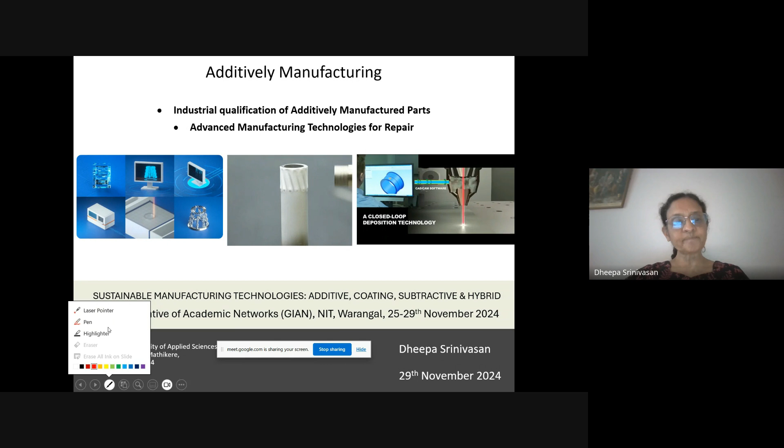I just wanted to check, are you able to see my mouse moving? Yes, yes. Or maybe I'll use the laser pointer.

In the last four or five days you would have heard a very good introduction as well as several details of the historical evolution of different types of metal additive manufacturing, polymer-based additive manufacturing, and more recently, design for additive manufacturing. I won't repeat any of those.

What I will show via this chart: the y-axis is simply showing the complexity of the part, and the x-axis is showing the different process-related parameters, just to give you a process map of which additive manufacturing technology is the right one, form fit and function, to choose for each application.

Even if you're in academia and would like to look at fundamental aspects of these, it's always good to keep in mind at least the end application, and then look at the research aspects and what are the challenges in those research aspects.

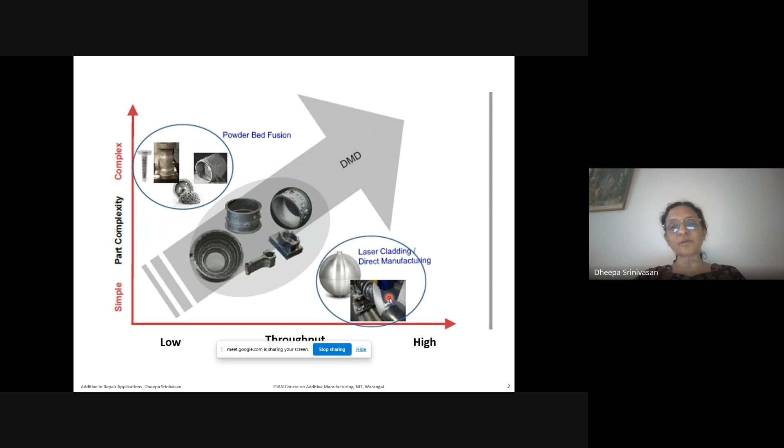For example, if it is a very large part, it is not very feasible economically or process-wise to use laser powder bed fusion. But if it's a very small part, such as what Mr. Santosh would have told you yesterday, in design for additive manufacturing with very high resolutions, then it may not be feasible or viable to go with directed energy deposition, because then you can't get the kind of surface finish and part resolution, and it needs extensive post processing.

So, based on the simplicity and complexity of the part, and based on the throughput—high versus low—that means how many parts do you need.

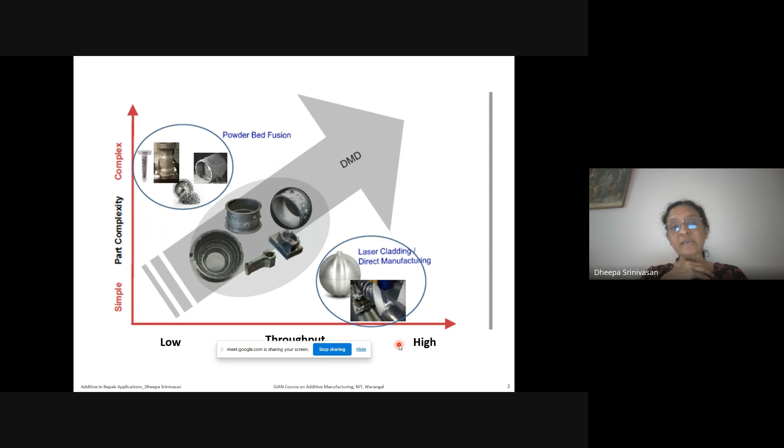For example, if you're in the automotive industry, many tens of thousands of parts every day. Now if that is the case, then which is the technique to use. So before starting the research or something, it is good to keep this in mind. So I thought I'll just showcase that and start off on repair applications.

This is a very old chart taken from the literature, and it's also not very updated. You can see it's tracking about 70-75 years of historical evolution of various types of gas turbine materials, especially for the turbine blades. As many of you know, in any structural engineering turbo machinery, especially in something as complex as a gas turbine, in this context we'll be talking about both industrial gas turbine as well as aero engines. Then you can see here that typically it takes a lot of effort to be able to get a very small percentage of efficiency. You can see that 40% to 60%, it has almost taken from 1970 to about 2005, almost 50 years it has taken.

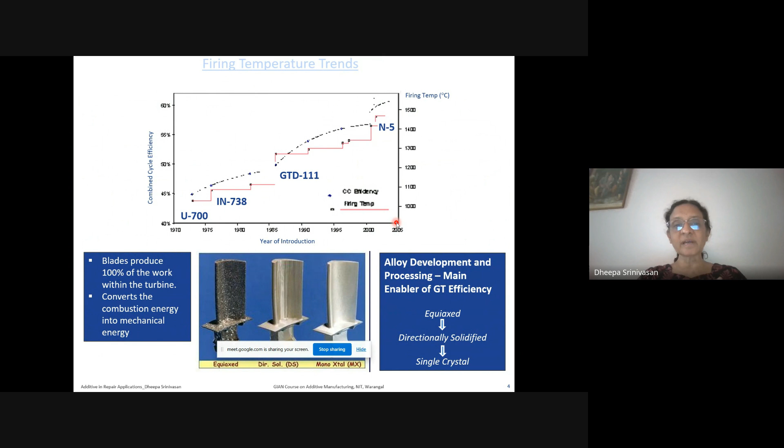Since I worked in the gas turbine industry, the application I'm showing you is for gas turbine repair and refurbishment. So again, on this slide, some of these names you're seeing here: Udimet 700, Inconel 738. This is a particular alloy which is single crystal, N5, it is called. So some of these alloys almost defy the imagination of the designer, because these are nickel based super alloys, which are the main claim to fame to the gas turbine technology evolution. And they have so many alloying additions. Each of them plays an indispensable role.

So when it comes to the distress, after service exposure, for example in a gas turbine stage one blade, then the temperature decreases from top to bottom, and the stresses increase from top to bottom. It's a rotating process. So what happens? There is distress. Obviously, anything that undergoes service will undergo wear, rub, high temperature creep, time dependent inelastic strain, fatigue. There'll be holes, there'll be oxidation, there'll be metal loss. So many distress, or so many degradations will be there.

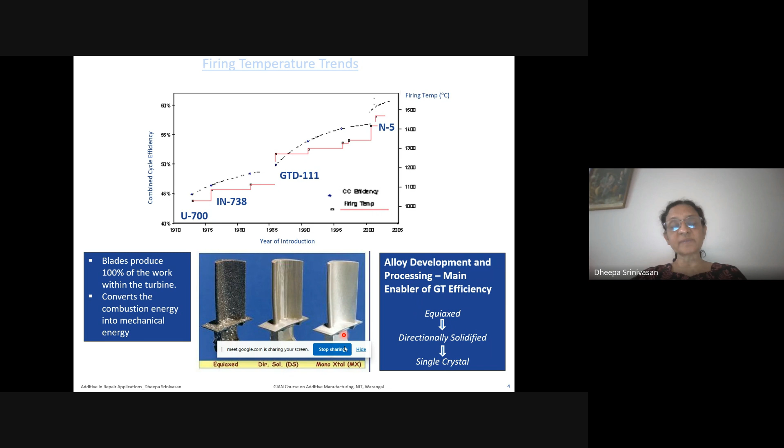And what I'm trying to say is we need to find newer solutions, because some of these are impossible to repair and refurbish. So where metal addition, in terms of metal additive manufacturing, and thermal spray coatings, both of these come into the picture as a savior. And this is something we started actually working on long back, 15 years ago, as trials, as research and development efforts, long before additive manufacturing actually became a buzzword. So those are the examples I'm going to be sharing with you in the next hour or so.

So if you look at laser metal addition, then what are the key parameters for it?

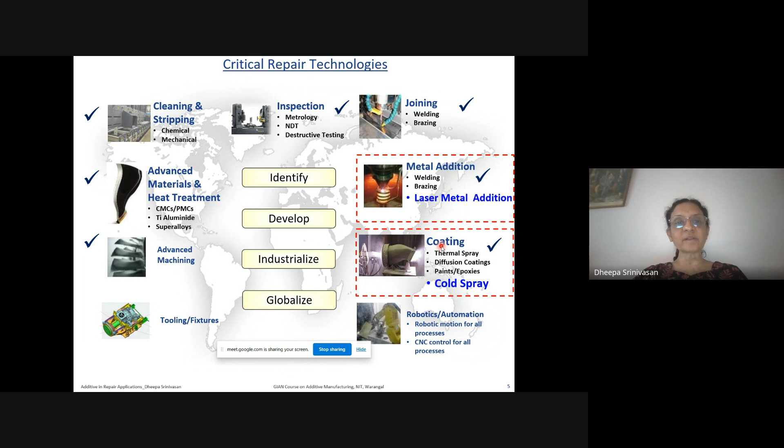There is also an upper spec limit and a lower spec limit, depending on each type of equipment manufacturer and each type of company, which have acceptability criteria. But for something like gas turbines, there are global standards too. People have to qualify under what is called the FAA, the Federal Aviation Administration.

There is also the European Union Aviation Safety Agency. In India, we also have the Directorate General of Civil Aviation. Like ISO, you need to have regulations, specifications, and certifications in order to repair and put a part back into service, just like for new make.

Except that after a certain amount of repair, after a certain number of operating hours, the cost of repair can exceed that of a new make—just like in our home appliances. If we have a microwave oven and keep replacing the magnetron, after four replacements it outweighs the cost of a new microwave oven, isn't it?

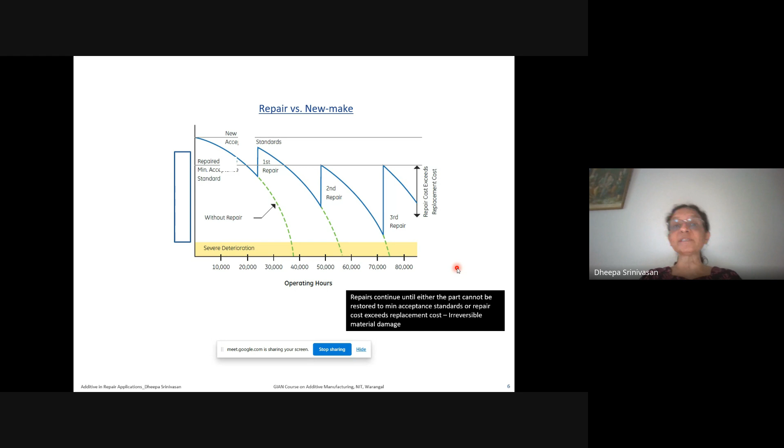But if you have to use that to repair an existing part, then what about restoring the material back to its original service standards and acceptance standards in terms of performance until the next interval? So there are a lot of complications.

It's quite a complex problem, and that is where we thought we will take advantage of all the advantages given by additive manufacturing. You would have heard Professor Shrikant Joshi speak about it the last three days, namely additive offers design for additive manufacturing in terms of simplification of parts, reduction in weight via DfAM, and being able to design very complex geometries that can improve performance.

Overall, you don't need to stock up parts and lock up liquid cash, and if necessary, we are able to make it perform to much longer standards and much higher overall performance in terms of design for the next-in-line technologies.

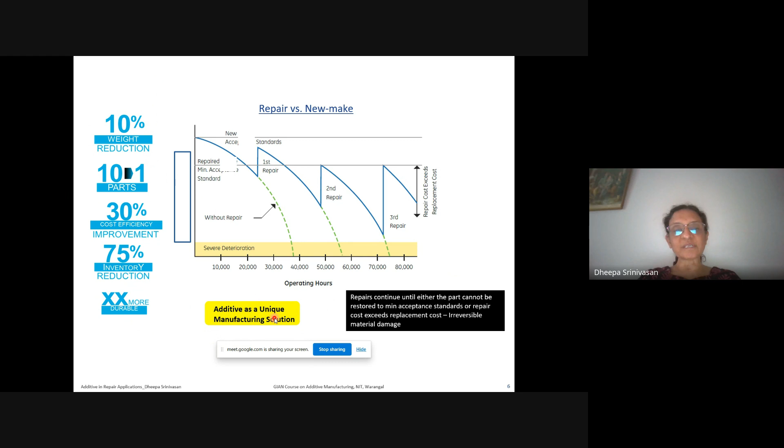So we thought we will take into account repair and use additive as a unique manufacturing solution. Why? Because of the very high rapid solidification, of the order of a lakh to a million degrees per second, that takes place in metal additive manufacturing. We wanted to examine this, because necessity is the mother of invention—if there is no solution available, we have to look at ingenious ways, and that's where additive comes to the rescue.

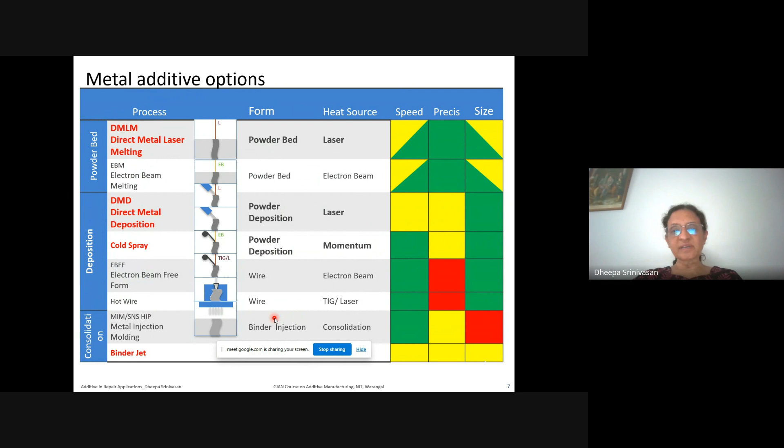So this is just another tabular form of the same, where on the rows I have listed all the different types—direct metal laser melting, which is nothing but laser powder bed fusion, and direct metal deposition, which is nothing but direct energy deposition.

And I mentioned to you cold spray is a different powder technique without any melting and solidification, and so forth. But what I would like to highlight mostly is this traffic light kind of qualitative comparison.

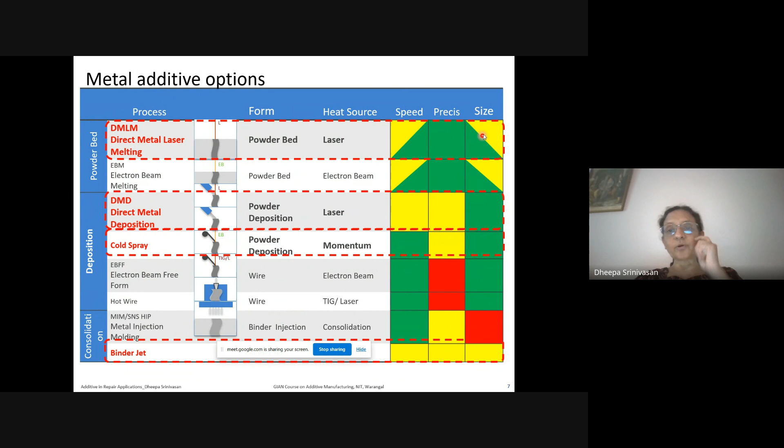This is just to give you an idea: if you want high precision, then you go to direct metal laser melting or metal additive laser powder bed fusion. If you want great speeds, perhaps this cannot churn out - it's a little bit of a slow process. All are slow, but relatively speaking, direct energy deposition is much faster compared to laser powder bed fusion. If you want to make large footprints - 800 millimeter by 800 millimeter by 1 meter parts - then you're not choosing the right technology if you go to direct metal laser melting. Instead, direct energy deposition is the best, and so on and so forth.

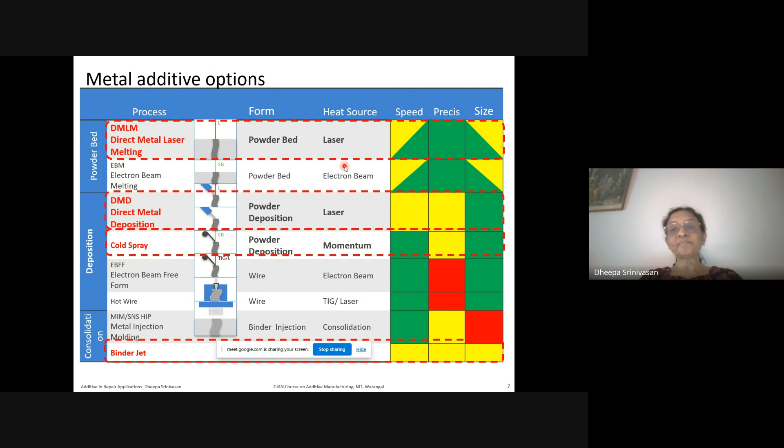I won't run through all of them, but I'm saying, for people who are starting out or who are interested in an application, or even if there is a fundamental scientific understanding that we want to do, it is good to keep in mind which of the techniques is suitable for which application. So these are the metal additive options.

The examples I'm going to give you are two. This was done in collaboration with Intech DMLS in Bangalore, and the direct energy deposition with DM3D in Michigan. One example I'll give you with laser powder bed fusion, the other is direct energy deposition.

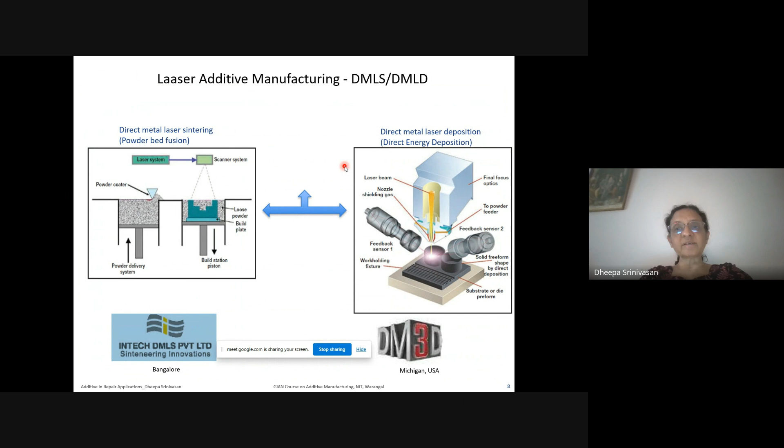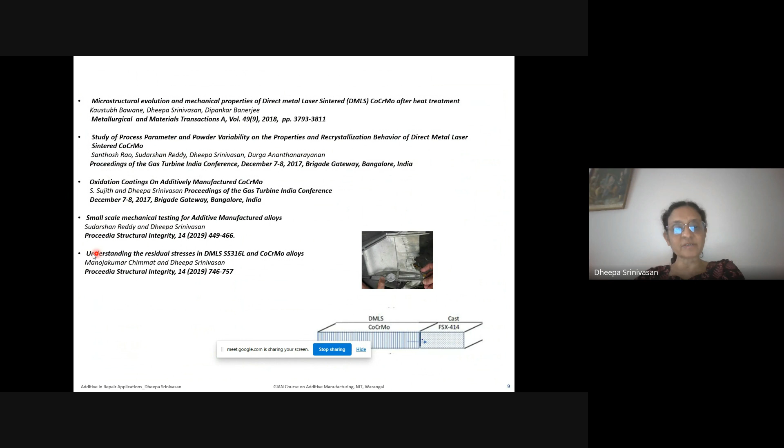And the first example - these are all published works done by various students. MTech students Kaustubh Bawane during his stint as an intern, then we've got Santhosh and Sudarshan from PSG Tech and from SASTRA University. This study on parameter optimization, both of them were master's students. Then Sujith, who was from NIT Surathkal, and later some of this work developed in small scale mechanical testing, published and done by Sudarshan Reddy. And then Manojakumar Chimmat was another master's student from NIT Surathkal.

So the application here is basically a worn part, and most of the structure-property correlation I'm showing can be found in all these papers. The application was a worn out stage one nozzle vane, which was made of an investment cast cobalt tungsten alloy. There was really no repair solution available because this was an investment cast part.

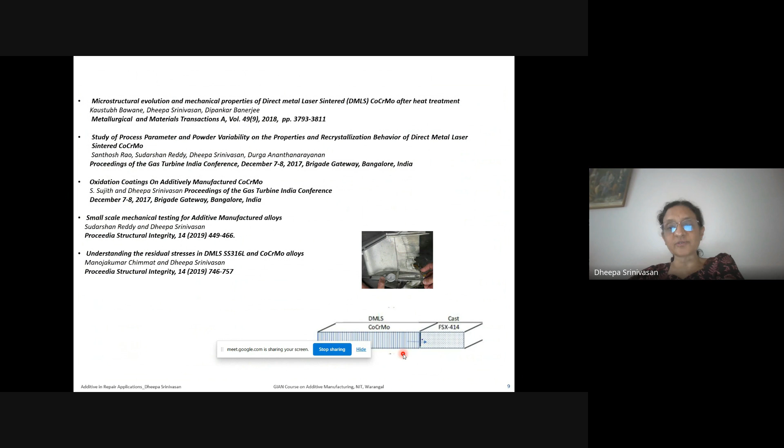So we came up with the idea of using additive manufacturing, using the laser powder bed fusion technique as well as the direct energy deposition technique, just as a proof of concept, to see if we can print this part and then join it by TIG welding. So this is the application - completely dissimilar material welding, dissimilar manufacturing, and then upon that conventional welding.

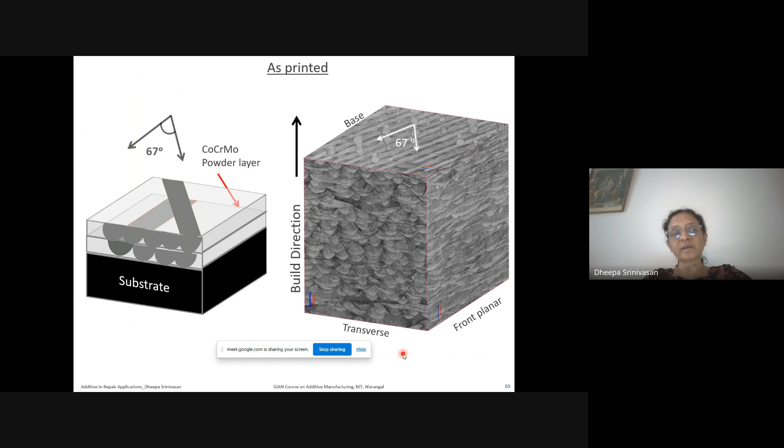So it's sort of a hybrid approach in repair, and I'm going to tell you some of the challenges we faced, and how we overcame that to successfully take it to about a technology readiness level 4 to 5 to 6, all the way from 0 to 1 technology starting point.

Okay, so you're all familiar with the layer by layer welding and solidification process. There's a nice 3D etched microstructure of cobalt chrome moly. This is the build direction - the heat is extracted along this direction in this particular case. There's a nice etched microstructure that the MTech student Kaustubh Bawane actually etched, and then he has put together a collage.

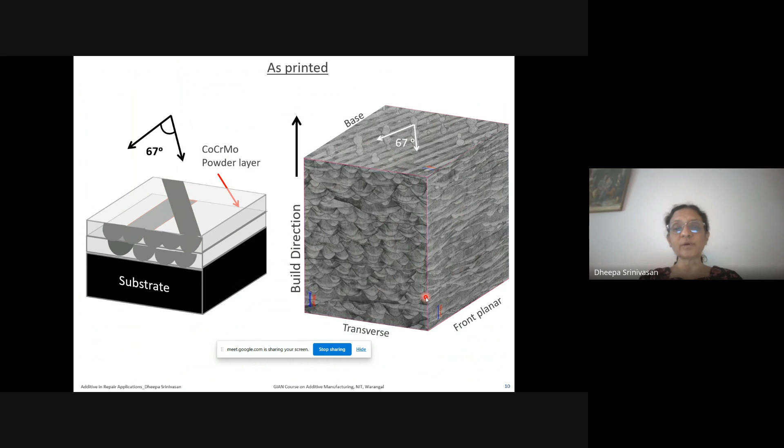So what we're talking about is what the first challenges are, and I'll keep talking about challenges along the way, because since 2000, in the last 10-15 years, a lot of work has been done by a lot of people all over the world, so that getting dense parts is no longer very difficult - unless it's a very high latent heat specimen like aluminum or copper, or some metals which reflect the laser light. Their thermal conductivity is so high that you need much higher power to make dense parts. But otherwise, for most other structural popular alloys, getting a dense part is not very difficult.

What I'm going to showcase here is a small design of experiments we did during the thesis of Santosh from PSG Tech, where we looked at the effect of layer energy density in order to get a dense part without any hot isostatic pressing, because most turbine hot section aero engine parts necessarily need hipping.

Sometimes in additive manufacturing, and there's lots of literature on Inconel 718 and other materials, people have tried hipping. But hipping, particularly for additive due to the rapid solidification process, sometimes results in segregation of elements. So not always the energy density that is fine-tuned may be conducive, even if it appears optically dense. It may or may not give the necessary properties and long term stability.

So what we tried was first changing the laser power, scan speed, layer thickness, and thereby the energy density. As you know, energy density is nothing but laser power divided by hatch spacing into scan speed into layer thickness. We also did location-specific variation to see how variation in the process parameters would influence the microstructure and mechanical properties of the as-built specimen.

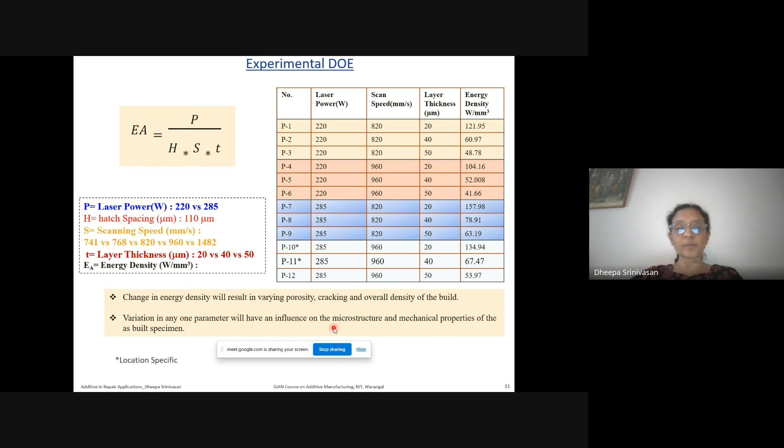When we started, this was many years ago, so it was still the first time. You see layer lack of fusion, and then a lot of inbuilt porosity and sometimes unmelted particles, if you can see this.

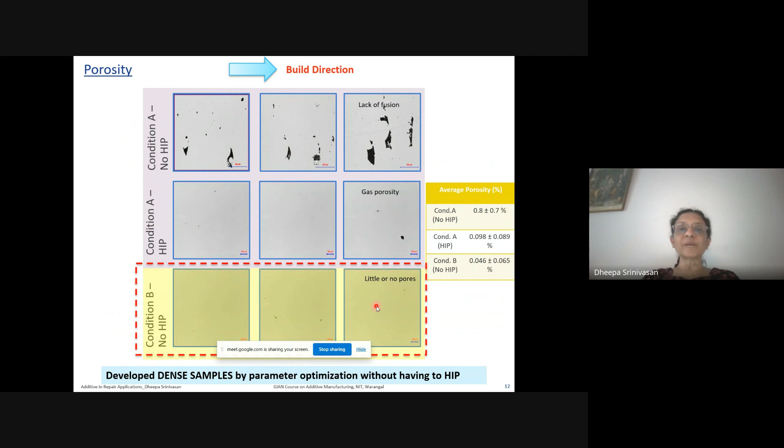Soon after, with the energy density I showed you in the previous slide, we were able to get a very dense structure, one with hipping and one without even hipping. This was quite an achievement those days, because without hipping, first of all there's a process step that is reduced. Secondly, if you're able to avoid a process step, time is also less. And lastly, if going without hipping gives you even better properties and long term thermal stability, then why not? It's a win-win.

So as we moved on, we went on to look at parameter optimization - as I showed you two slides earlier, what is the hatch spacing, which tells you the overlap in the layers, as you might have learned earlier this week. We were also looking at what kind of pattern - is it a chessboard, or is it a zigzag contour, and so on.

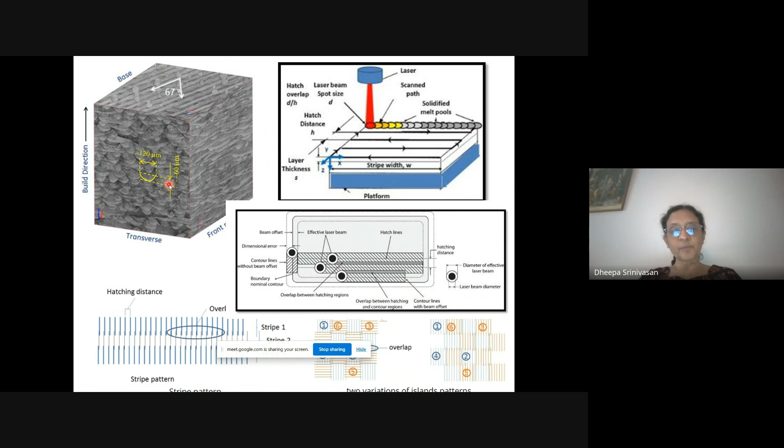This whole thing was optimized so that productivity is also met, and it's not a very slow process. At the same time, there's no compromise on the y equal to f of x, in this case density and simple room temperature mechanical properties. But the application itself needed high temperature properties - I told you it was a hot section part, isn't it?

So what we went on to do is take the microstructure of the as-built structure I showed you. We did optical microscopy and very detailed scanning electron microscopy, as well as detailed transmission electron microscopy, to make sure we understood the phases present and any metastable phases, so that the equilibrium stability could be mapped thoroughly from the as-built structure.

However, in principle, we had to heat treat the samples, because remember, we were going to do a weld repair, which means you need to do a pre-weld and post-weld heat treatment. So as part of the master's thesis, Kaustubh tried a bunch of heat treatments, and the heat treatment resulted in a microstructure with a beautiful uniform recrystallized microstructure.

The second or third challenge I'm trying to highlight here is the fact that typically in these kinds of processes, where heat transfer plays a major role, you have to watch out for not always having an equiaxed structure without any texture or orientation effect.

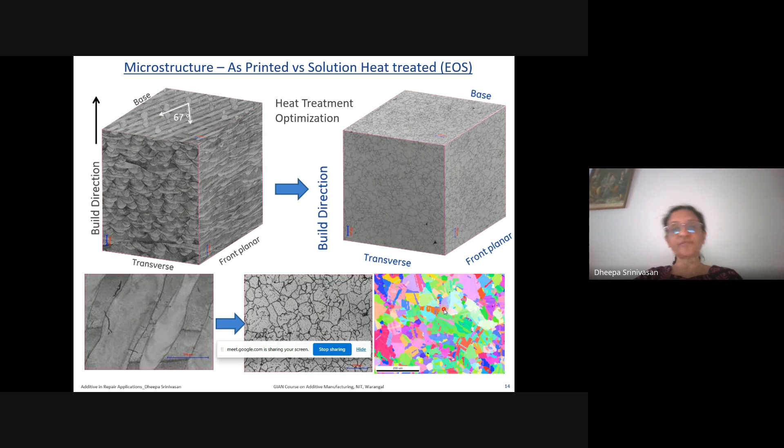Luckily in our case, you can see this is an electron backscatter diffraction image, EBSD pattern, and it shows that this fine grain recrystallized microstructure, after heat treating the cobalt chromoly, is actually not having any preferred texture. So that was a great thing.

With that, we went on to the next part, which is to evaluate in detail the mechanical properties, details of which you can look up in the paper. But since the subject is also successful qualifications, one of the things you need to look out for is the surface roughness in any surface optimization, or surface roughness in any near net shape part via additive manufacturing.

I did mention earlier there's a directed energy deposition process. The surface roughness is quite rough because it's a high throughput rate, with larger powder particle sizes, and a much faster way of building the part, which necessitates further machining to reach the near net shape geometry.

Whereas in laser powder bed fusion, whose example I'm showing you right now, you can do a bit of process optimization using the laser parameters themselves, the energy density variability, so that you're able to minimize the surface roughness, not only on the surface, as shown in condition A versus condition B, but also inside any geometrical features, such as a hole.

You can see that between condition A and condition B, the surface roughness has been reduced from nearly 20 to less than 5 micrometers Ra. Whereas in the coarse case, the rough features were very rough, with very sharp corners and unmelted particles visible on the left hand side. On the right hand side, it's much, much reduced.

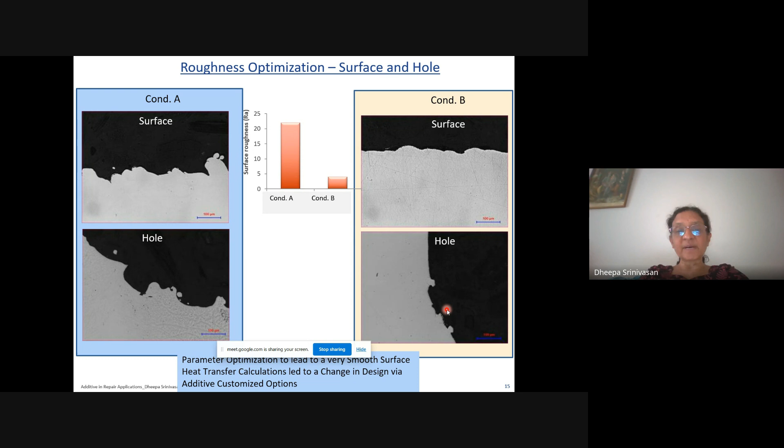These gauges can physically measure the surface roughness of the built part, especially in geometry such as cooling holes, and then pair it up with numerical calculations and flow physics calculations to make sure there's no hot spot or constriction of the cooling hole leading to less air passing through it, and so on. So heat transfer, that's what we did.

Now, when we move on further to actually scale up, say we are successful with the microstructure, successful without any texture, successful in the mechanical properties and the surface roughness, then the next thing would be to go from an experimental coupon level to a larger scale, obviously in the build plate.

This is where there's another big challenge to watch out for in the qualification. As you increase the number of parts in the build plate, you can have distortion because of the heat transfer that is different when you're making one or two parts versus 20 or 30 in the build plate. So what happened in this case as well is because of residual stresses and the heat transfer when scaling up the number of parts, we also faced that.

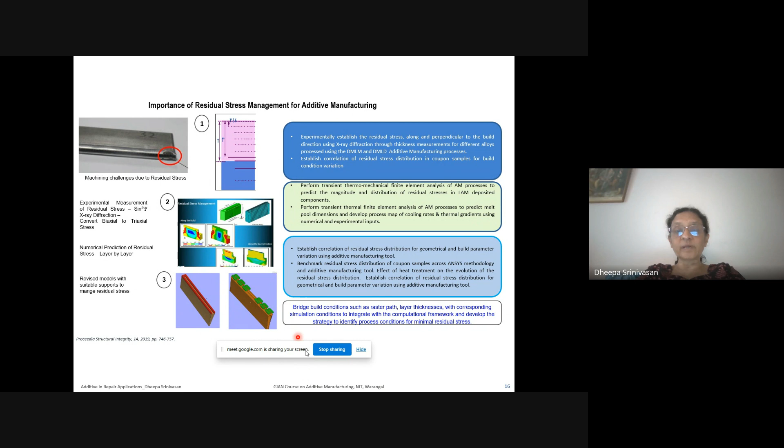So, experimentally determine the residual stress along and perpendicular to the build direction through X-ray diffraction. Then establish correlation of residual stress in the coupon with necessary build parameter optimization. Then perform the transient thermomechanical fatigue finite element analysis, numerical modeling, and correlate the residual stress experimental measurements with the numerical simulations, in such a way as to optimize the parameters. That is the recipe highlighted in these four boxes.

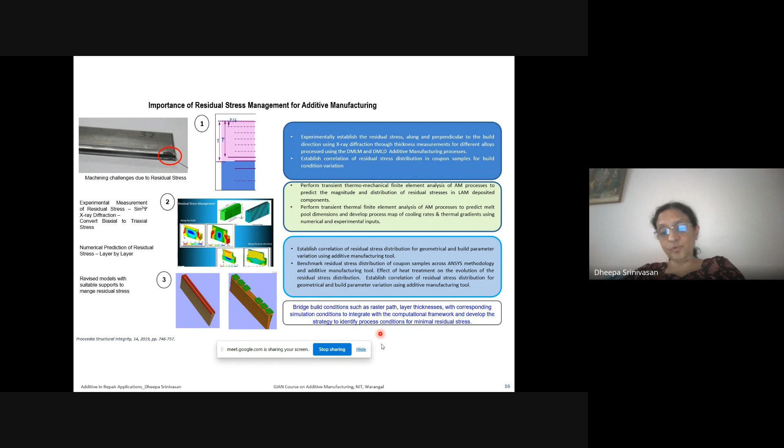What we did is determine with X-ray diffraction from the surface through thickness, as a function of as-printed condition, grit blasted, and heat treatment at 950 degrees. As a function of heat treatment, we were able to see whether initially it is tensile stress. You can see this is the zero axis on the surface, there is a tensile stress. Then when you grit blast it, it becomes compressive residual stress, minus 300 megapascals.

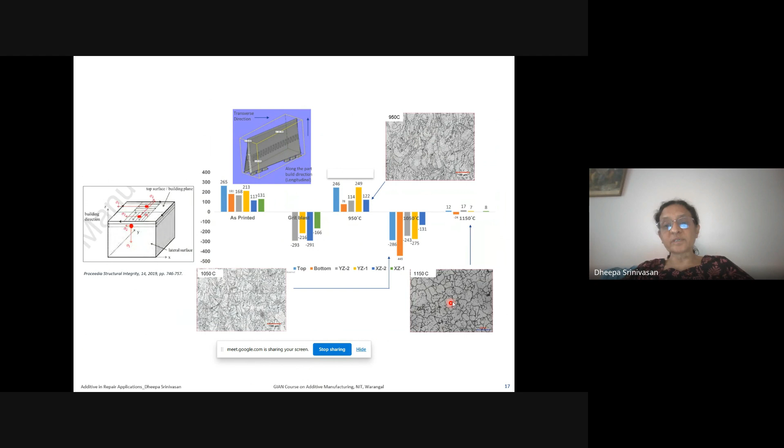When you heat treat it to 950 degrees, this is the microstructure, which is again a bit of tensile. When I heat treat it to 1050 degrees and cool it, for this equiaxed structure, it has a maximum compressive residual stress. This is all through-thickness measurement.

Having established that, with a grasp of the complete structure property correlations including scalability, these are some pictures taken in the manufacturing place at Intech DMLS. You can see we built a qualification package. This is the support structure, and these are the test coupons for microstructure and mechanical property determination.

As I told you, we incorporated at least 5 to 6 challenges in terms of how we took it from the coupon level all the way to scalability and qualification. This involved design for additive manufacturing.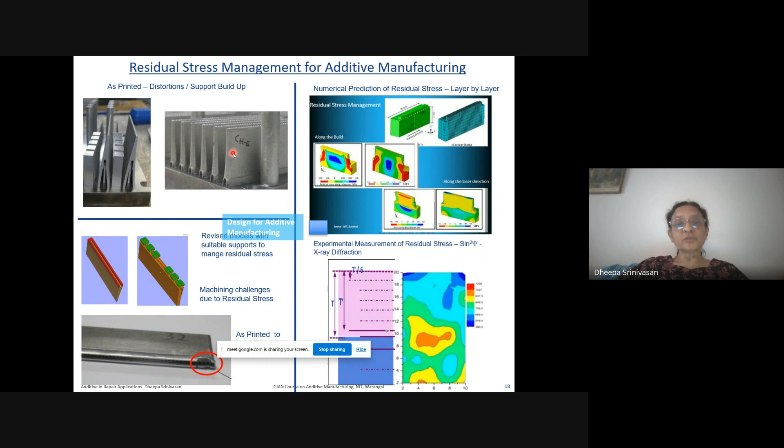Then we took on further fundamental studies, also part of Kaustub Bhavane's work. We developed a technique to build this additively manufactured coupon on the repaired part, which is the vane.

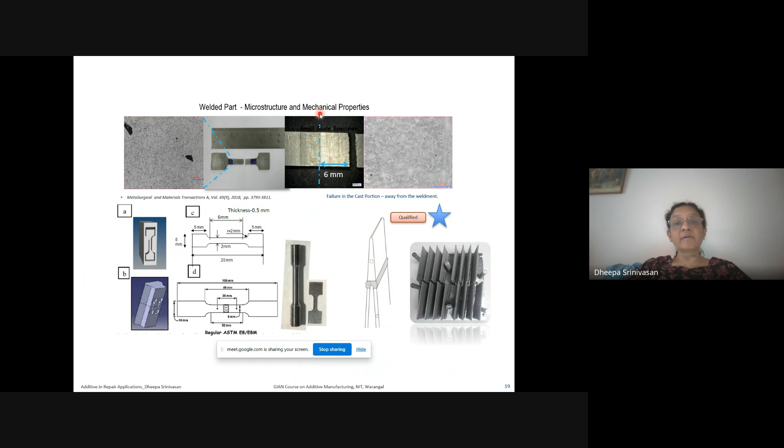We were very happy that the failure did not take place exactly at the joint. The failure was actually very much inside the cast FSX414, as you can see here. This distance is about 6 millimeters, which is the safe zone, the additively manufactured coupon zone of CoCrMo.

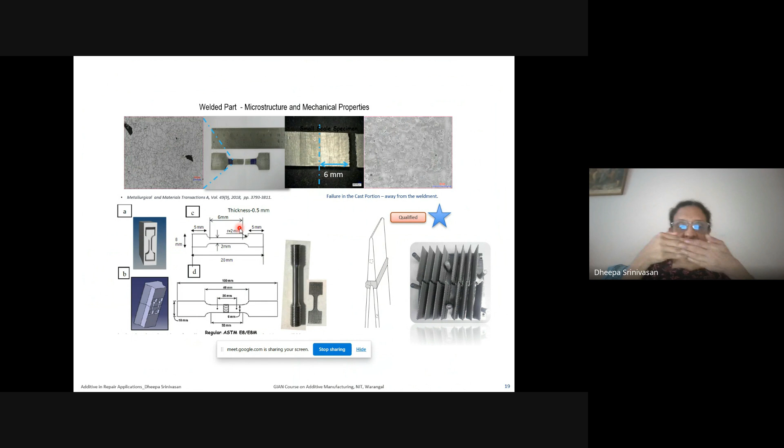One of the big challenges here: because it was a thin part that was welded, there are no well-defined test techniques to qualify this particular joint, since typical test samples are quite bulky, as shown here. This is ASTM E8, one of the smallest specimens, but obviously I can't take it out of such a thin joint where I've joined it by weld repair. So there's a big need for developing small-scale testing and getting it qualified.

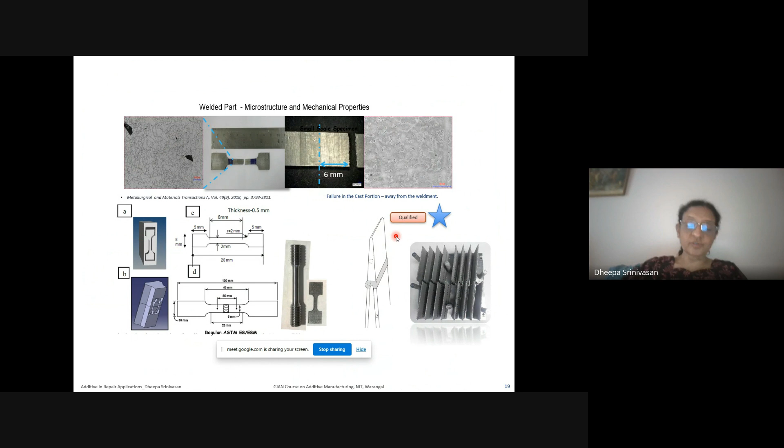This would accelerate the applications of using additive manufacturing for both new make, advanced designs, and repair solutions. So I'll leave you with this thought and move on to the next example.

This top part is what we completed and shared with you, and these are the welded parts. What we also did, shared with you at the beginning for the same example, is we tried in parallel using direct energy deposition and directly coating on this, adjusting the fixture, so you directly cut the damaged part and build it using direct energy deposition.

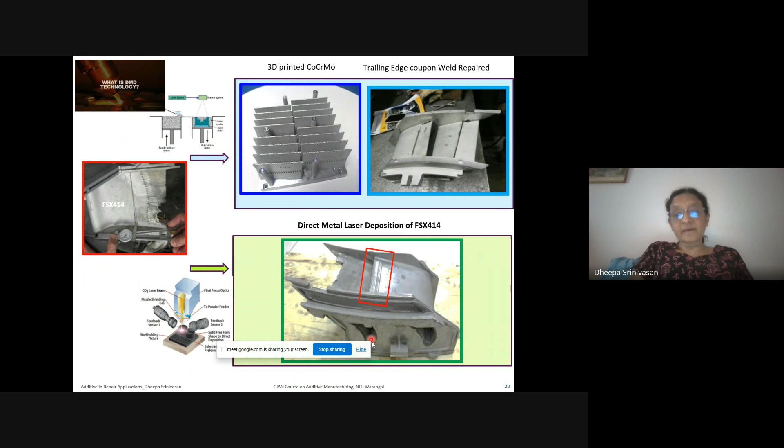With that also we had a success story. It was not bad at all. Again, this is part of Kaustub's work, published in his MTech thesis.

What you could see here is the microstructure: this is the cast FSX414, and this is the additively built powder-based direct energy deposition material. Compared to laser powder bed fusion, the columns are much larger, and there is columnar or epitaxial growth, unlike in laser powder bed fusion where there was no texture at all. You can see the primary dendrite arm spacing, the secondary dendritic arm spacing, and small dendritic features emanating out of the primary arms. So this has a very directional structure, quite different from that of laser powder bed fusion.

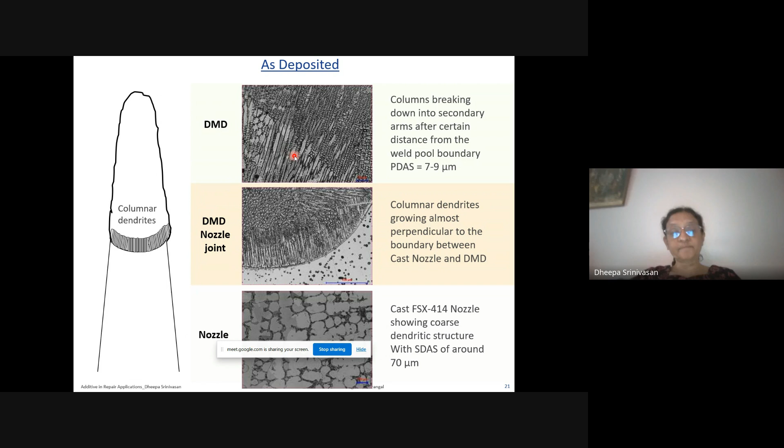Of course, the material here is directly the material of construction of the vane that is used for the example in this particular case study.

So now with these two examples, I'm going to move a little bit into showing an example again published in Proceedings of the ASME Gas Turbine India.

This was done during this stint, where colleagues Hariharan and others were working on this, and we wanted to weld repair this particular part, again partnered with DM3D in Michigan. This was a combustion swirler, which is responsible for NOx reduction.

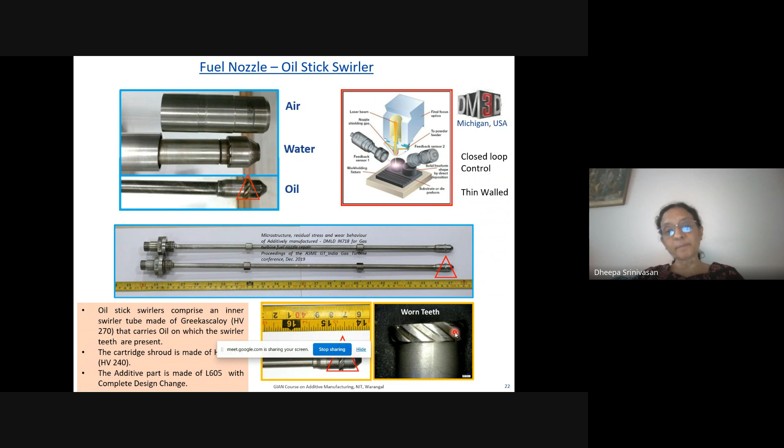There was worn out teeth here, and this could not be repaired. They were all thrown out and scrapped. So we came up with a solution of using direct energy deposition.

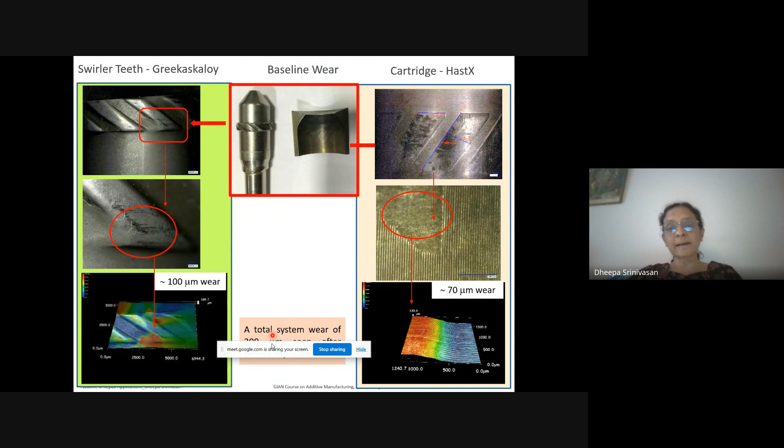We started by measuring, from the thrown out worn tubes, the meter-long tubes made out of stainless steel, calculating the maximum extent of wear from a few samples, maybe 15 to 20 of those tubes. The total system wear was calculated using a digital microscope and optical microscope. Then we found a solution to use direct energy deposition to deposit different materials which were much harder, because otherwise there's no repair solution.

They were throwing all these parts away into the scrap, and then these were experiments. The design of experiments was done by a student, an intern at DM3D, and they developed the process parameters, and in about 5 to 6 months came up with a perfect solution for this geometry, where they had to deposit a much harder lubricious metal, because it is going to undergo wear again when the combustion, when they put it back into the gas turbine. So they had to find this.

So these were tests done in the lab, wherein we used a fretting fatigue test of this geometry. You can see the coating is about, the whole thing is about 2 millimeters L605 on the substrate. And we looked at the cross section of both the shoe and the block, and see if there is a correlation between the two in terms of what is going to be the wear by additively manufacturing and adding a lubricious wear resistant layer on top of the Greekascaloy or the stainless steel.

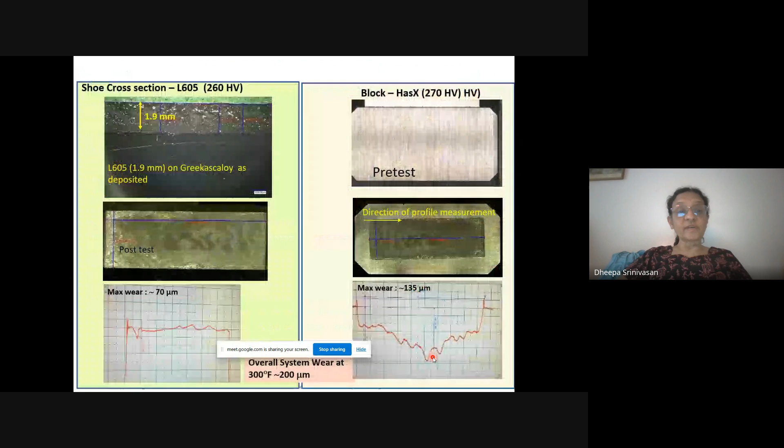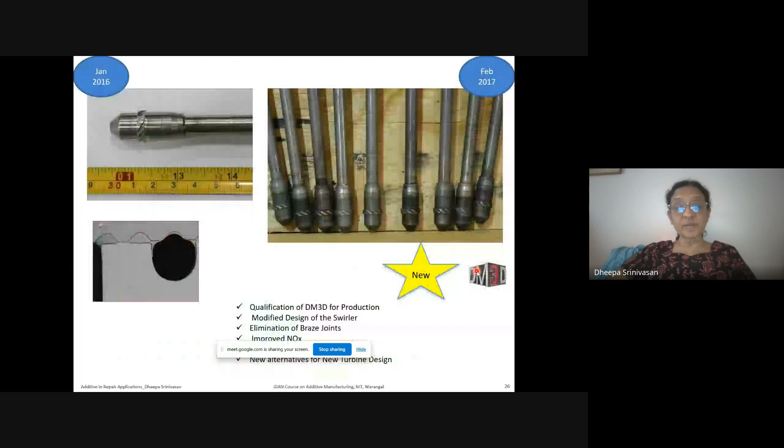So once we established this, then did a lot of dilution studies of the interface. I think it's here, so we did a lot of microstructural studies as well, and then looked to see that there was no cause for concern. And then using the wear testing experiment, in this particular case, we didn't have to do anything other than the wear testing. Of course, hardness was done as a precaution, but the actual design was one of wear.

So we actually simulated the wear conditions, and this was qualified in 2017, as you can see here. It took about 8 months to get all these correct parameters and qualify these repairs in the repair shop.

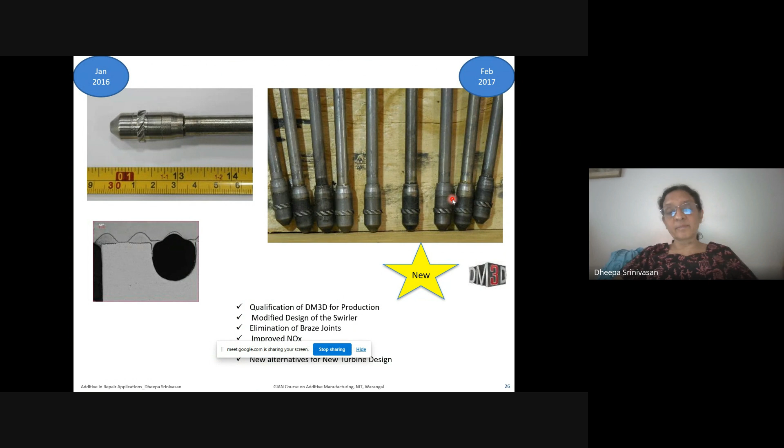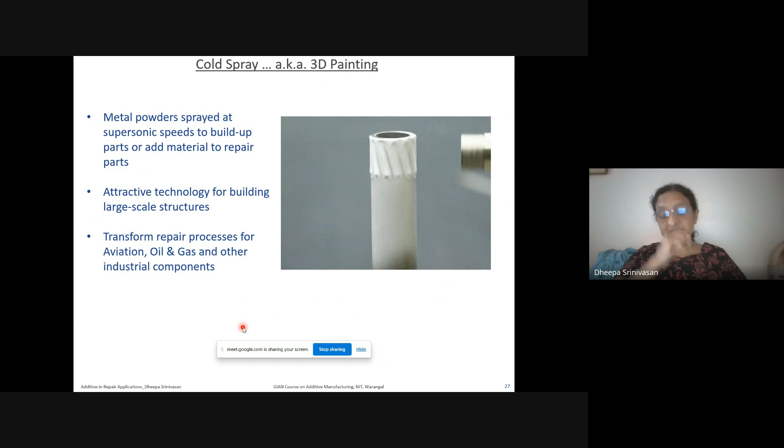Okay, so the last example is that of cold spray, because cold spray is basically not a melting and solidification process. Here, what happens is you have a nozzle, which is a convergent divergent nozzle, using process gas such as very low atomic number and weight gases like helium and nitrogen. The gases carry these powder particles similar in size range to that of the laser powder bed fusion process, which is between 5 to about 30 to 40 micrometers.

And it gushes, it creates a sort of a Venturi effect, and the gas carries with a momentum and goes and smashes the particles onto the substrate that it is going to have an effect on. And the severe plastic deformation, there's no melting or solidification, is used for a number of components, for repair, for corrosion, for wear, for very difficult to weld materials, and so on and so forth.

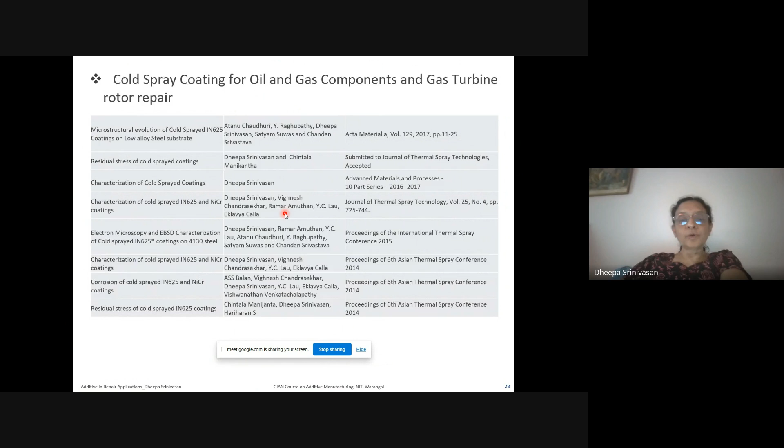Then, as I mentioned to you, it's a convergent diverging nozzle. Powder particles go and form a coated layer on the substrate that you can see here, without having any of the ill effects of conventional thermal spray process in terms of poor deposition efficiency, and not very effective for restoration of components, because...

There's so many advantages. Basically, it is relatively cold spray, and you can even make coatings, or you can make material as thick as even 25 millimeters, 20 millimeters, 15 millimeters. All it has to do is it has to be a metal which is undergoing plastic deformation in order to be able to spray on this.

And the other advantage, especially the lot of Air Force related applications in the last 15 years, where they're using cold spray for very difficult to weld and repair alloys, like light alloys like magnesium, titanium, which will catch fire, aero engine materials, aluminum, very very difficult to repair, cast iron for example. So all these, cold spray is seen as a very good repair technique.

Moreover, cold spray is also akin to shot peening, so that fine powder particles are coming and impinging on it. Since some of the low light elements like aluminum, titanium, it even is able to give some kind of a compressive residual stress and enhances the fatigue behavior of the base metal.

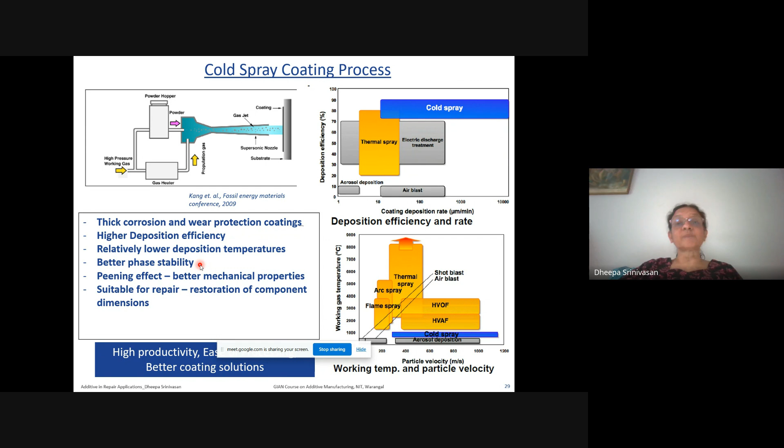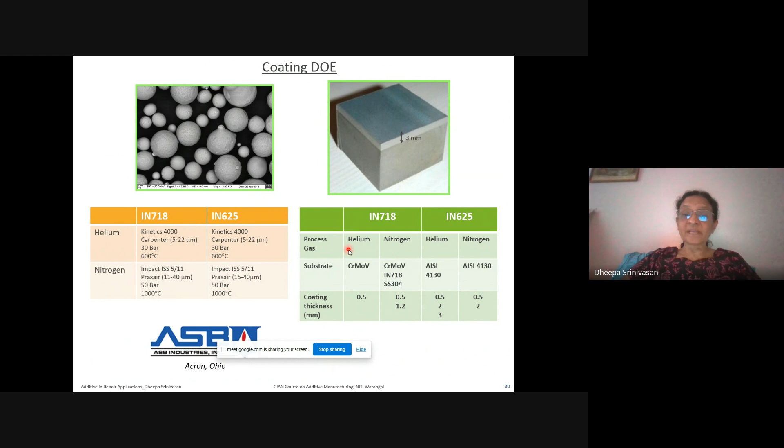In the lab, we were able to make this onto a chromoly steel substrate and spray up to 3 to 5 millimeter thick coating without the coatings falling off. We tried a comparison between helium and nitrogen as a process gas. For this application, the substrate materials were chromoly and Inconel 718. The coating thicknesses ranged between 0.5 to 3 millimeters, and the micron RA is a surface roughness.

Typically this is how the microstructures look. This is the substrate and this is the coating. Likewise here, this is the substrate and this is the coating. In the top picture you can't really see the substrate. We are trying two different nickel-based alloys for better functional properties such as better corrosion response and better wear resistance onto chromoly steel.

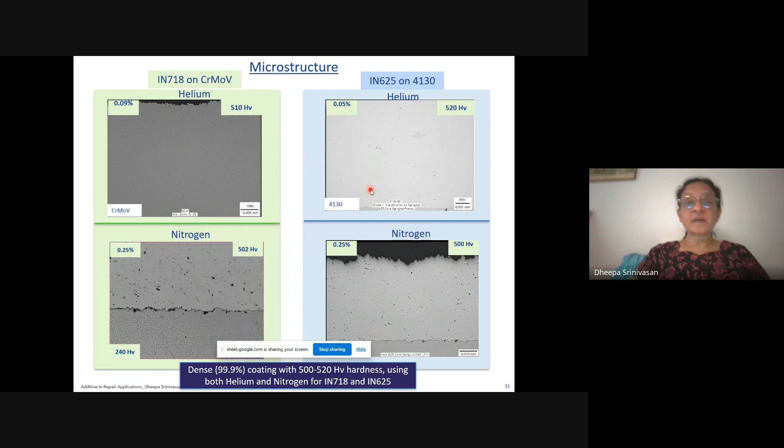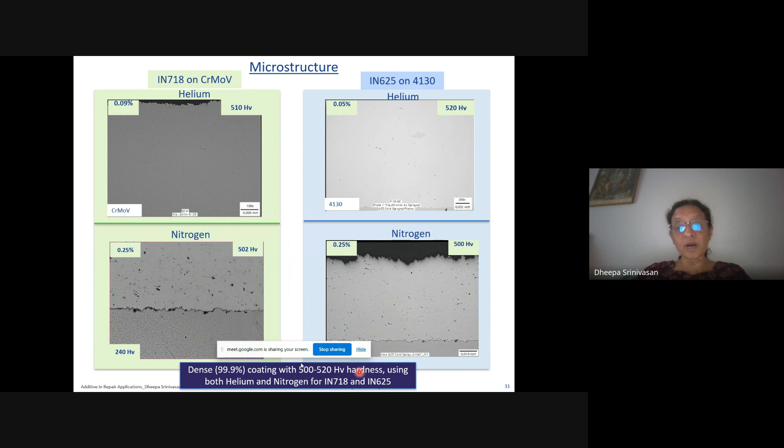In this slide comparing the microstructure, you can see the cold spray coating is fairly dense, especially the one sprayed using helium as a process gas. The nitrogen does give some porosity, but it's not such a big cause for concern. These coatings are so hard, nearly 500 to 520 HV in hardness, for both Inconel 718 and Inconel 625.

Then we did the statutory bond adhesion test, as per ASTM C633 standard. This means when you have a coated round specimen, you apply specific glue to it, then pull it in uniaxial tension, and see what is the nature of the failure - is it cohesive, adhesive, or glue failure? Fortunately if it is glue failure, that at least tells you, if the glue to glue strength is about 100 megapascal, that your coating adhesion strength is more than 100 megapascal.

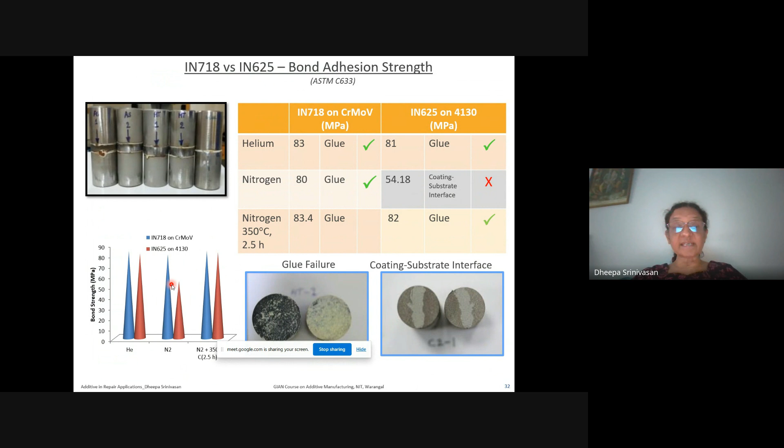So it's a very crude and qualitative test, but a very useful engineering ballpark test so we're able to compare different materials and processing techniques. That is what is shown here. In blue is Inconel 718 on chromoly, and in red is Inconel 625 on 4130. You can see that with nitrogen gas, the porosity we saw in the previous slide may cause some problems with the bonding between coating and substrate, but that can be overcome by heat treatments giving a metallurgical bonding.

This is an example of one other mechanical property and a challenge we faced: if I make a 3 millimeter coating on a substrate, there are no test techniques available to test such thick coated substrates. Normally we make a thin coating and assume the substrate is infinite thickness. In this slide, the green colored symbols are with nitrogen, the red is with helium. At this ratio, we had to tone down the coating thickness so much that it is seen as a thin film on the steel substrate.

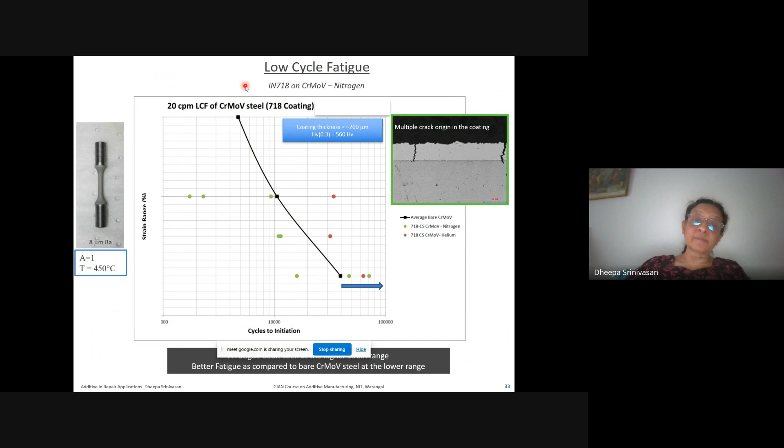The black line is the baseline number of fatigue cycles to failure for the chromoly steel. This is another big challenge, and it is necessary to develop test techniques commensurate with near net shape additive manufacturing, as I indicated during the laser powder bed fusion hybrid manufacturing process discussion. Another challenge I wanted to show: the left hand curve shows residual stresses through the thickness of the Inconel 718 coating on chromoly. One challenge we face is also that in very heavy high density structural materials like nickel, cobalt, and so on.

Sometimes a cold spray process, while it works really well for lighter alloys and metals, can completely recrystallize and cause some severe plastic deformation into the steel substrate, so much so that the substrate can alter the microstructure or the texture, and it can lead to premature failure despite having the compressive stresses.

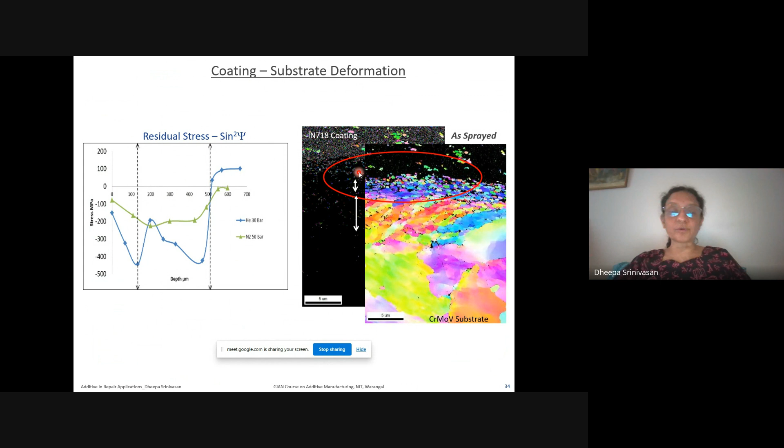So in this case, you can see recrystallized grains. This is the coating-substrate interface. This is the coating, this is the substrate. You can see a large gradation in the microstructure, and at the vicinity of the interface where severe plastic deformation has taken place, you can see completely recrystallized microstructure out here.

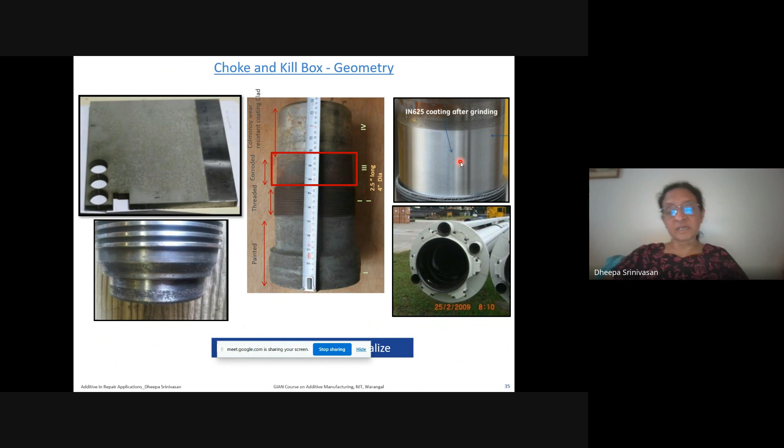This is for drilling and production subsea oil and gas systems. We applied the cold spray solution at lab scale, transferred the technology to ASB Industries, and this is the result after machining.

I hope I gave you a glimpse. We could have gone into details of each and every one of them, but I've only taken snippets from open domain published work from those journals that I shared with you.

What is it that we do for accelerated qualifications and certifications? I just wanted to show you that a number of organizations specialize in creating specifications, powder-based specifications for each and every one of the additive manufacturing chemistries, as well as techniques of additive manufacturing. And of course, we are looking at accelerated part qualifications in terms of repeatability and reproducibility.

We do need to keep in mind a whole bunch of both operational as well as metallurgical challenges. Some examples I showed you: surface roughness, heat treatment optimization, isotropy of microstructure and texture, long-term stability, isotropy of mechanical properties at that particular temperature, and how surface roughness can be tailored to optimize the design for additive manufacturing, and so on and so forth.

So of course, inspection technologies is a big area that the whole additive community could do with some novelty and state of the art techniques.

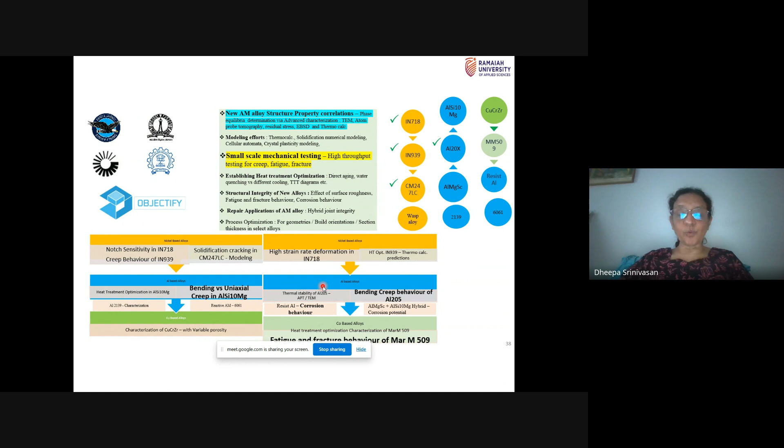Especially in terms of a new technique of small scale testing of bending creep, we have published at least 4 papers on that in the recent 2 to 3 years, and that will give you an idea of the direction forward in qualification of additive parts for various applications.

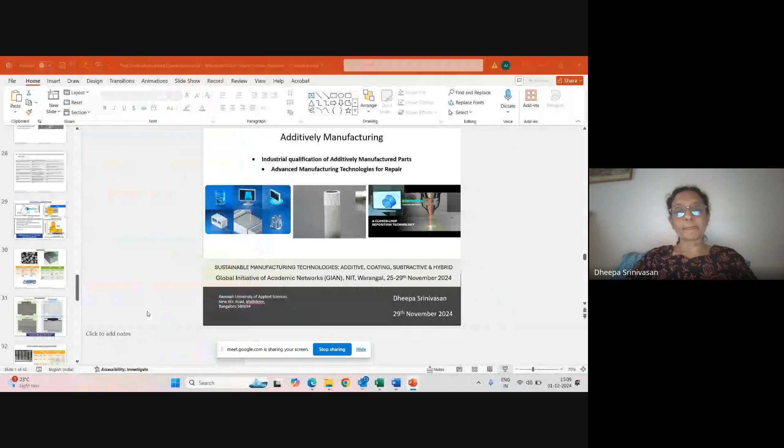I have finished, Dr. Manjaya.